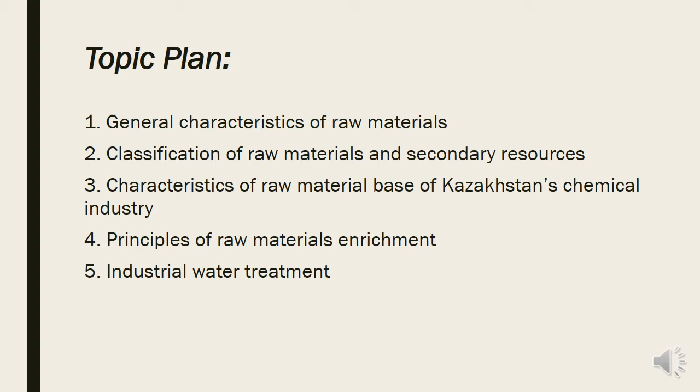And let's start with general characteristics of raw materials. The chemical industry is one of the largest manufacturing industries in all developed and emerging countries. While many of the products from the industry, such as detergents, soaps, and perfumes, are purchased directly by the consumer, others are used as intermediates to make other products. The industry uses a wide range of raw materials, from air and minerals to oil.

Raw material or feedstock is the basic material from which a good product is manufactured or made. The most basic raw materials are those that are pumped from the ground or mined. Brine and oil are two large initial sources. It's amazing how many chemicals are derived just from these two sources. Other sources of chemicals come from plants, animals, and the ocean.

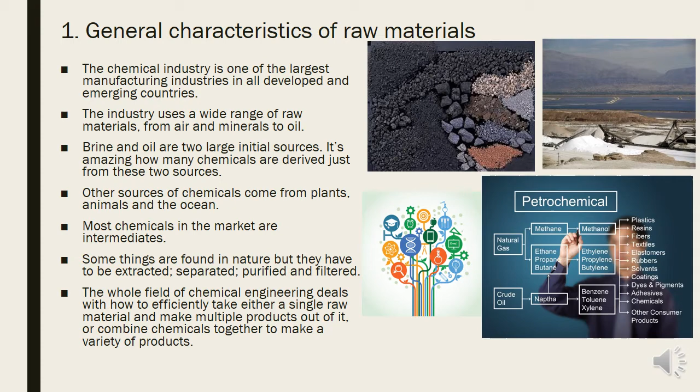Most chemicals in the market are intermediates. Some things are found in nature, but they have to be extracted, separated, purified, and filtered. The whole field of chemical engineering deals with how to efficiently take either a single raw material and make multiple products out of it, or combine chemicals together to make a variety of products. Chemical processing is part of a larger group called process industry. The common characteristic is that a few raw materials can be used to make many different products.

Every element on the periodic table is fair game to be used as a raw material in some finished product. The question is, what is the best source to start with to make the desired product? Chemical manufacturing turns raw materials into useful products for applications in materials, agriculture, health, and other applications. Chemical manufacturing is a subset of chemical industry involved in the conversion of raw materials into value-added products. These products may be more advanced materials or very simple materials that cannot be obtained from natural sources.

The raw starting materials are commonly from petrochemical sources. Fractional distillation of crude oil produces a wide variety of valuable materials for the chemical industry. Although the raw starting materials can be extracted from nature, the majority of the raw materials for polymers come from petrochemical sources or crude oil fractionation.

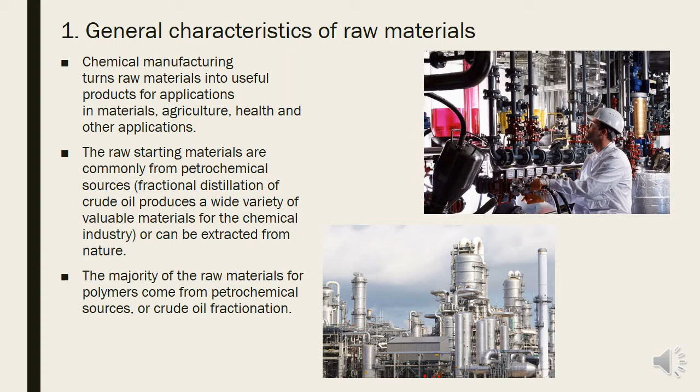Raw materials for chemical industry are classified by different qualities. By origination, raw materials are divided into mineral, vegetative, and animal. In its turn, mineral raw materials are divided into ore or metal, non-ore, and combustible or organic ones. Ore ones include iron, copper, chromium, and other ores that consist of metal oxides and sulfides. Ores containing various metal compounds are called polymetallic ores. Non-ore raw materials are table salt, phosphorites, gypsum, limestone, sulfur, sand, clay, etc.

Combustible fossil minerals are peat, coal and brown coal, natural gas, and shale. They consist of organic compounds and are used as raw materials and energy resources. Vegetative raw materials are, for example, sunflower, potato, wood, sugar beet, cotton, flax. Animal raw materials are wool, fur, leather, butter, milk, etc. Vegetative and animal raw materials are processed into food items and technical products of household and industrial use.

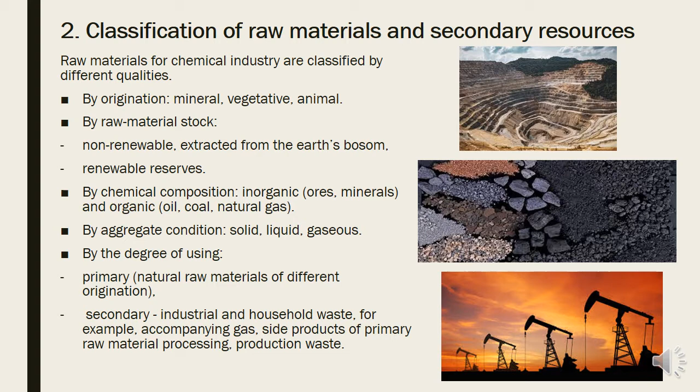By the degree of using, raw materials can be divided into primary, such as natural raw materials of different origination, and secondary, industrial and household waste, for example, accompanying gas, side products of primary raw material processing, production waste. Secondary material resources are essential sources of chemical raw materials. They include production waste, consumption waste, and side products.

Production waste is raw materials and semi-product leftovers that are formed in the production process and that have partially or totally lost their qualities and don't comply with the standard or technical conditions. Consumption waste are different used products, restoration of which is economically inexpedient, for example, completely broken machinery, glass, rubber, and plastic products, exploited reagents, catalysts, etc. Industrial consumption waste are unusable household and personal use products.

Side products are formed in the raw material processing along with basic manufactured products, but do not represent the purpose of the industrial process. However, side products, as a rule, can be used as final products.

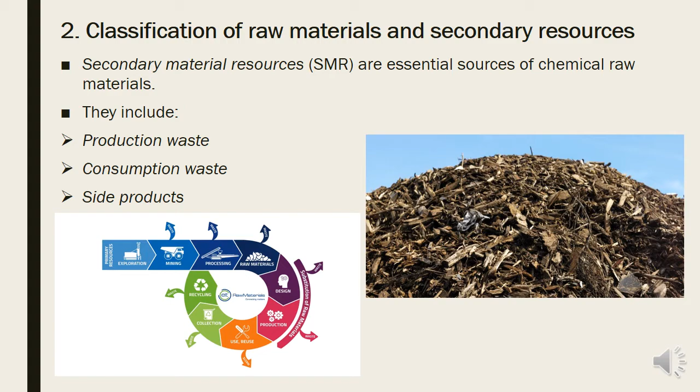There is a rich raw material base in Kazakhstan that provides national industrial productions with raw materials. Kazakhstan takes the second place in the world after Russia in explored reserves of phosphate raw materials. The largest basin of phosphorites is Karatau Basin with more than 40 deposits, and the second one is Chilisay deposit in Aktobe Basin. The largest deposits are Zhanatas, Koksu, Aksai, and Chulaktau. They are characterized by low content of phosphorus oxide and some admixtures content.

Phosphorite ores are divided into high-grade ones containing more than 27% of phosphorus oxide, run-of-the-mine ores containing 23 to 27% of phosphorus oxide, and low-grade ores with less than 23% of phosphorus oxide. Phosphorites are used in production of yellow phosphorus, phosphoric acids, salts, and fertilizers.

There are large deposits of oil and natural gas in West Kazakhstan in the Caspian Sea area. Kazakhstan is one of the largest centers of the Commonwealth of Independent States by coking and energetic coal reserves. The biggest coal deposits are located in Karaganda, Ekibastuz, and Maykubensky basins. There are also several deposits of brown coal.

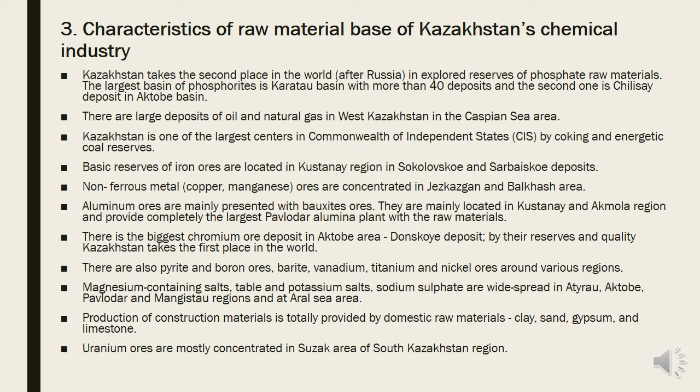Raw materials enrichment is a combination of physical and physical-chemical methods of mineral raw material treatment in order to remove the gangue and increase the content of basic component in the concentrate. In case when there are several useful components in raw materials, it is divided into constituent parts, fractions, enriched with this or that component. These fractions are raw materials for different productions. For raw materials enrichment, different methods are used. If raw materials are solids, the following methods are used: gravitational, electromagnetic, electrostatic, flotation, chemical method.

Gravitational method is a separation of natural raw materials based on different velocity of fallout of parts with different density and size. It takes place in fluid or gas flow or under centrifugal force action. An air separator, a cyclone, and a hydrocyclone are used for gravitational separation. This method is widely used for the enrichment of raw materials in production of silicate materials, mineral salts, and in metallurgy.

Electromagnetic method is a separation of natural raw materials by different magnetic permeability of components. For example, separation of magnetite, chromic iron ore, rutile, and other magnetic susceptible raw materials from gangue is conducted by this method. Or non-ore solid raw materials, limestone, lime, phosphorite, are subjected to enrichment to remove metallic impurities from the basic rock. An electromagnetic separation is used for this enrichment.

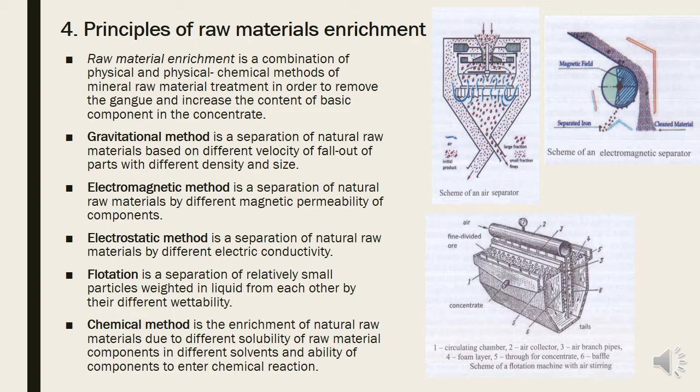Water is widely used in chemical industry. It is applied as raw material and reagent for many chemical reactions. It is often used as an absorbent for purification and washing various gases and solid materials from admixtures. Another direction of water application is enrichment of solid raw materials by means of flotation or hydromechanical method. In addition, water is applied in larger scales as a heat carrier or cooling agent. Since water is used in large scales not only as potable or sanitary water but for production purposes, there are stringent specific requirements for water quality.

Water quality is determined by such characteristics as transparency, color, flavor, total salt content, hardness, oxidation susceptibility, and water acidity. Water composition, possibility of its direct use for various purposes, or necessity of its preparation is determined based on technical analysis results.

Total water analysis includes a lot of different determinations and takes a long time. The analysis consists in determination of color, flavor, taste, acidity, content of oxygen, hydrogen sulfide, carbon dioxide, nitrates, fluorides, organic substances, hydrocarbonates, etc. However, conducting the total analysis is unwanted in many cases. One may be limited with a part of analysis only, and determination of various types of water hardness, oxidation susceptibility, and acidity has the largest value.